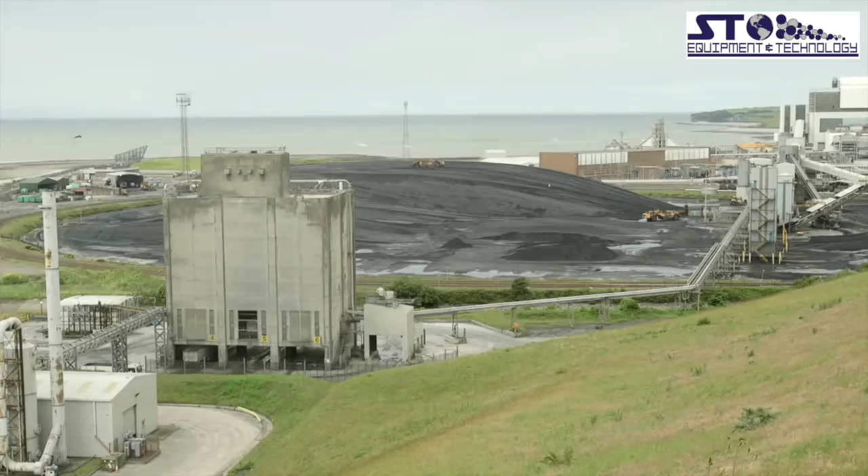Located in South Wales, Aberthaw is a 1,550 megawatt pulverised coal-fired power station comprising 3 units. The station was commissioned in the early 1970s and typically consumes some 5,000 to 6,000 tonnes per day of low-volatile semi-anthracitic coal, primarily sourced from local mines. This translates to around 250,000 to 400,000 tonnes per year of fly ash.

Historically, most of the ash was landfilled due to the fact that the high carbon and ammonia levels of the ash rendered it unsuitable for use in cementitious markets. This created a number of issues for RWE npower. Apart from the cost of landfill and the maintenance of the landfill site, there were increasing concerns being raised by local stakeholders over the ever-increasing size of the ash deposits.

In 2004, Lafarge Cement UK opened up discussions with RWE npower with the view of establishing a fly ash processing plant, CelticAsh, to supply its cement operation, conveniently located on a site adjacent to the power station.

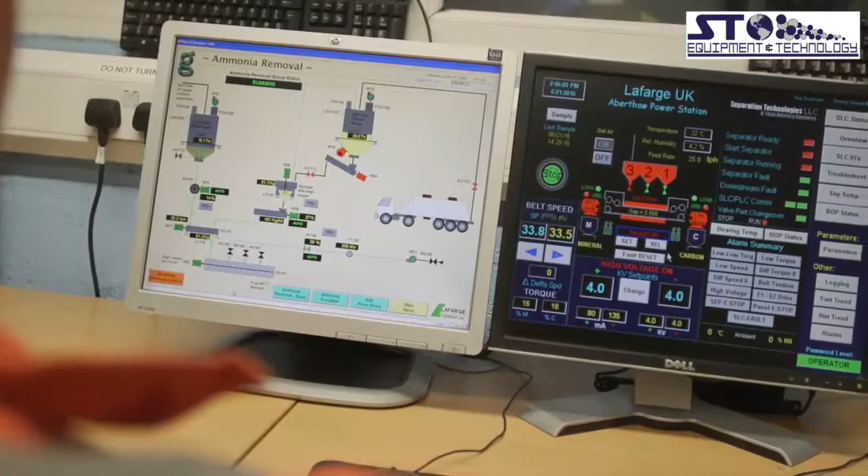CelticAsh offered many potential benefits for both companies. Increasing the use of fly ash in cementitious products would make a significant contribution to reducing Lafarge's environmental impact, both in terms of a reduction in CO2 emissions and a reduction in the need for quarrying of limestone and shale.

The use of fly ash will enhance the properties of concrete and mortars. The avoidance of landfill would offer significant cost savings and environmental benefits for RWE npower. The return of high carbon ash to the coal belts from the power station would offer significant fuel savings.

In 2006, and after a period of lengthy negotiations, Lafarge Cement UK and RWE npower arrived at an agreement to jointly fund the investment and operation of an ash processing plant at Aberthaw Power Station in South Wales. The actual share of the funding was based on an open book analysis of the relative financial benefits accruing to both parties. The £8.9 million project comprised of some 10,000 tonnes of ash storage facilities, truck outloading and weigh bridges.

The project also included ST equipment and technology for carbon separation, high carbon return to the power station coal belts, and ammonia removal from the ash together with an ammonia scrubber. The ammoniated ash was a result of ammonia injection to improve the performance of the electrostatic precipitators, rather than NOx reduction, the usual cause of ammoniated ash.

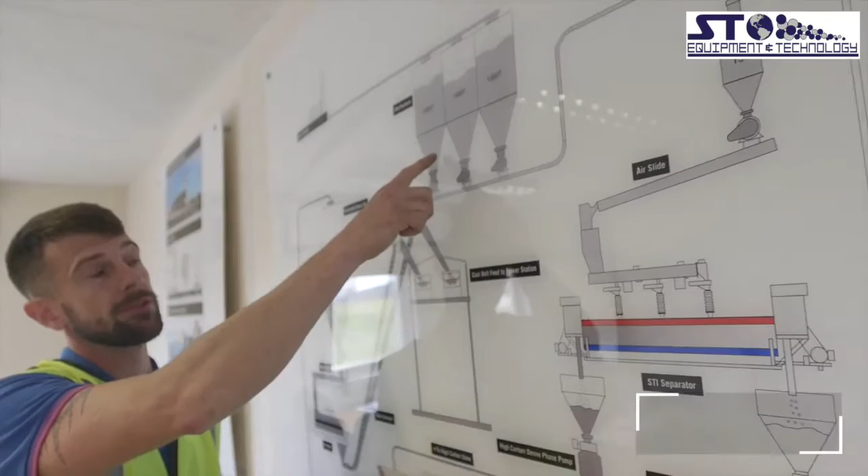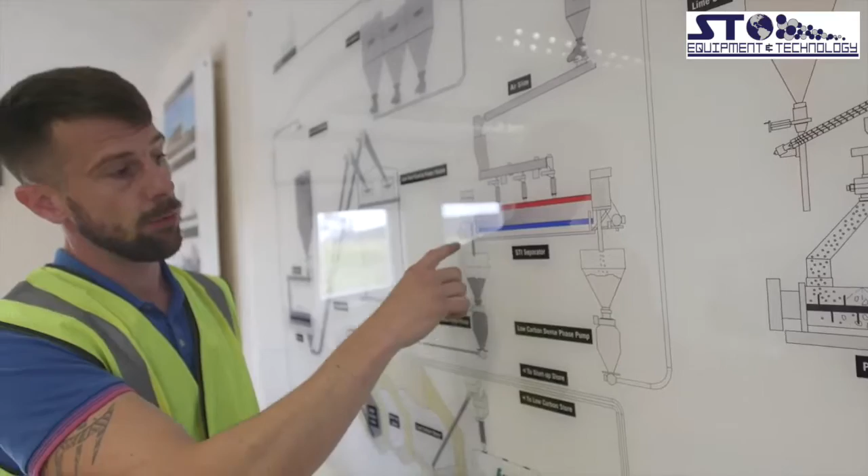The power station generates fly ash, which is transported to 3 silos. We tend to take from the middle silo and use blow pots to blow it across into a 15-ton silo in our factory. We use a rotary valve to control the flow into the STI machine, where we separate the high carbon from the low carbon.

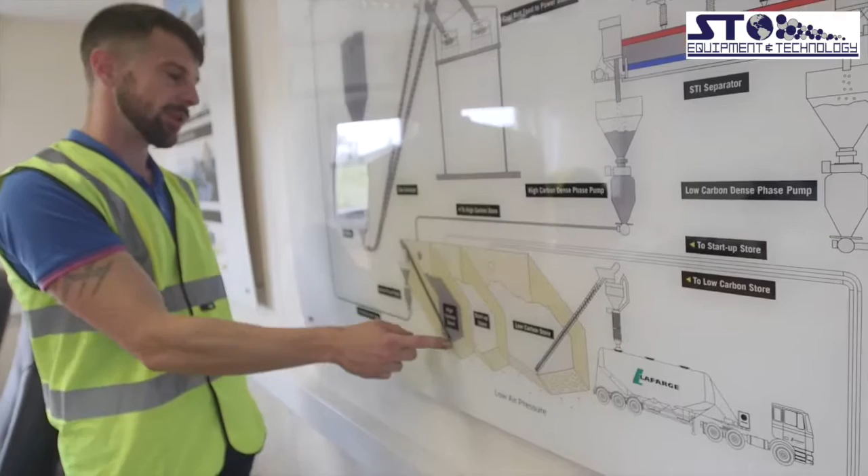The high carbon is then sent via a blow pot into a high carbon store which we've got in our plant. From this store we screw feed the high carbon up into a weigh hopper so we know exactly how much we transport back to the power station, and we then use a blow pot to transfer the material down into a 150-ton silo on the stock ground.

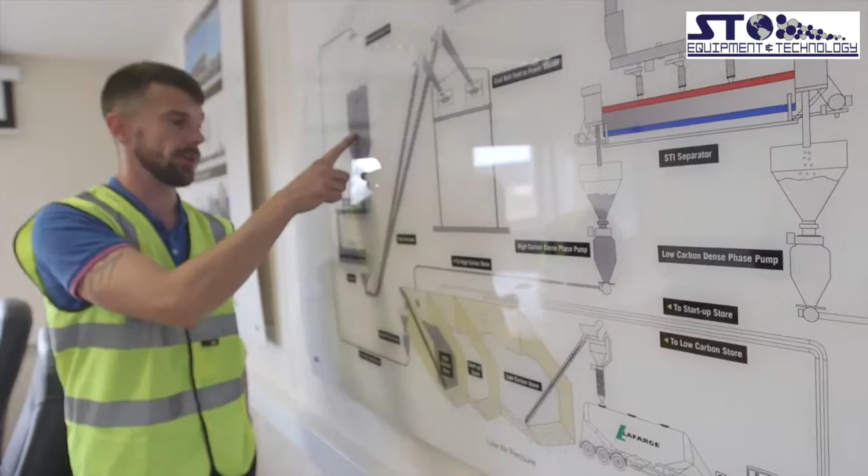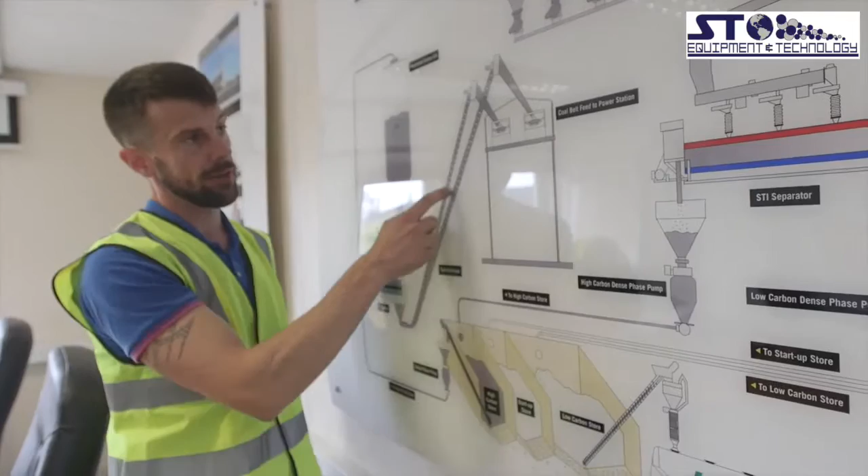From this silo we use a rotary valve again and drop it into a weigh screw, where we then add 20% moisture to make a condition that's transportable. We then use chain conveyors to send it up and drop the material onto the belt only when they're coaling for the power station. The low carbon, one of the characteristics here, is that it's high in ammonia.

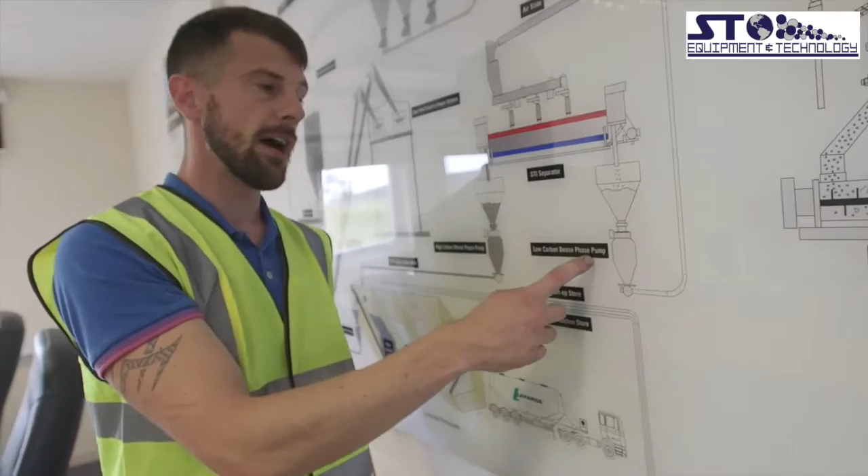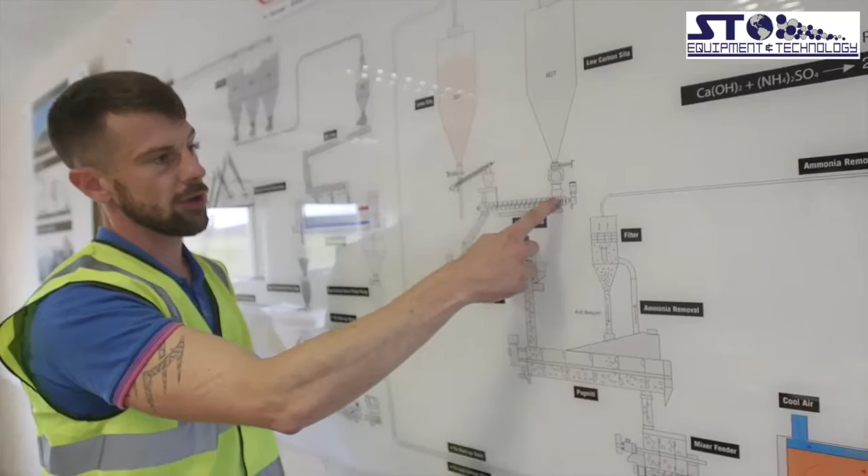So when we take the low carbon from the separator, we transfer it into a 60-ton silo. Again, using a rotary valve, we control the flow into a weigh screw where we add 0.6% lime. This is then sent into a pug mixer where we add 1% clean water.

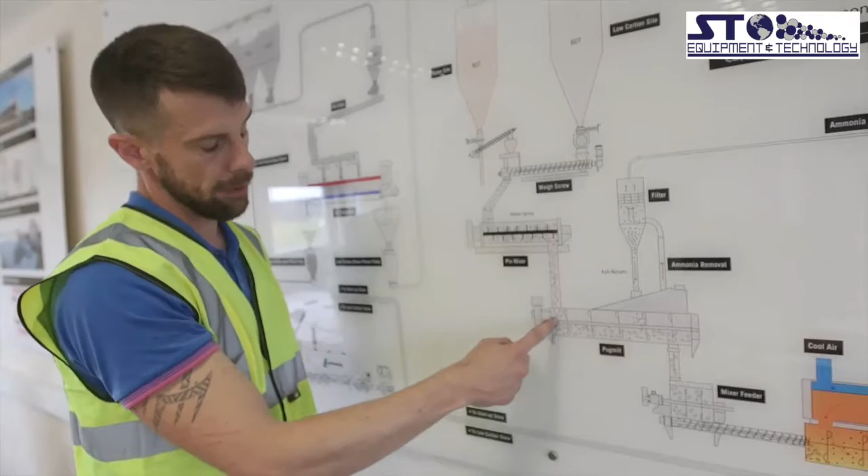There's a very quick mix that happens here, where we then drop it into a pug mill. The pug mill is where the reaction takes place, and basically what happens is the lime and water drive off the ammonia from the ash particles.

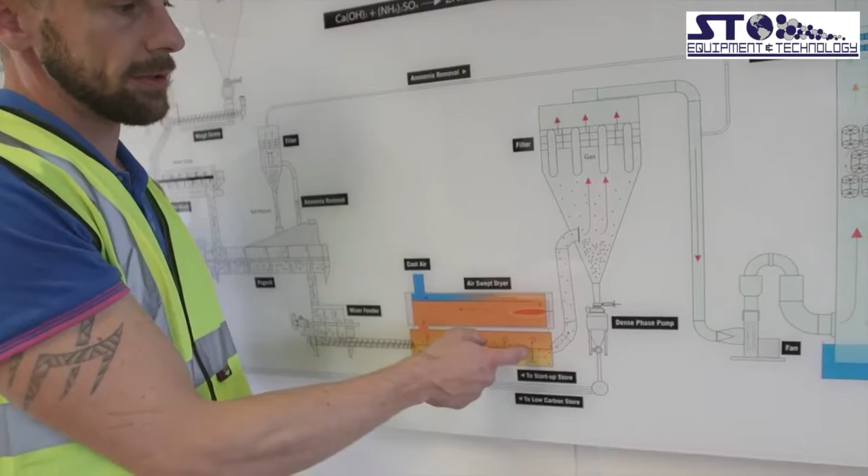We then drop it into a mixer feeder and screw feed it into a dryer. The dryer dries off the moisture and leaves a clean ash particle and ammoniated gas. The clean ash particle gets stuck on the outside of dust bags, drops down into a blow pot, and the blow pot then transfers it back into our stores, ready for dispatch.

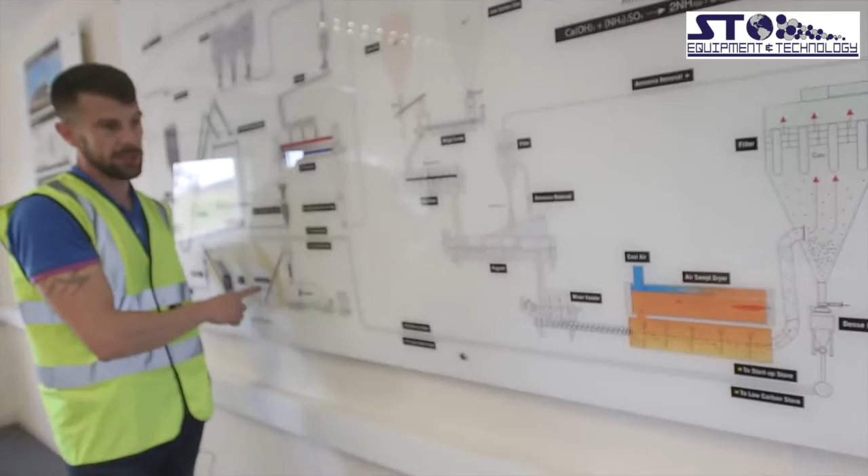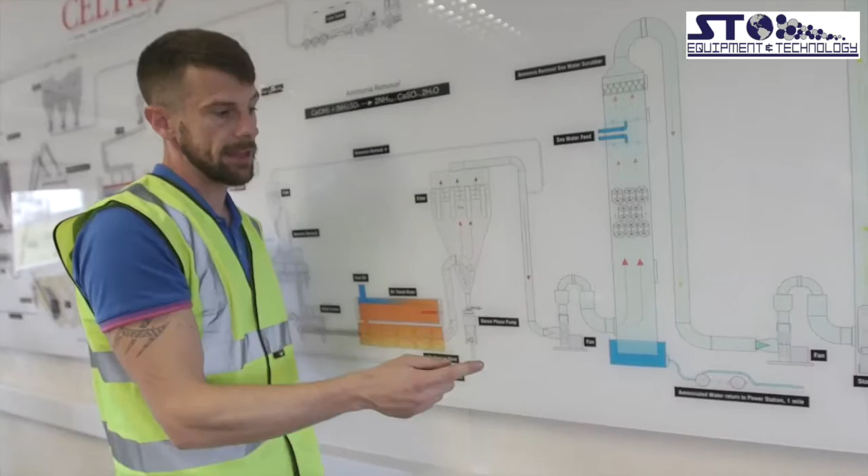The ammoniated gases pass out into an ammonia scrubber, where the ammonia is taken out of the gas, and we end up exhausting clean air and send the ammoniated water back to the power station for their water treatment plant.

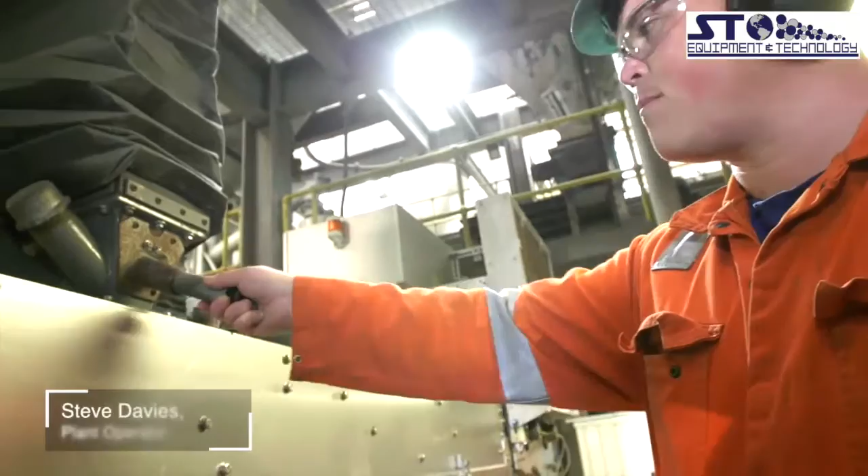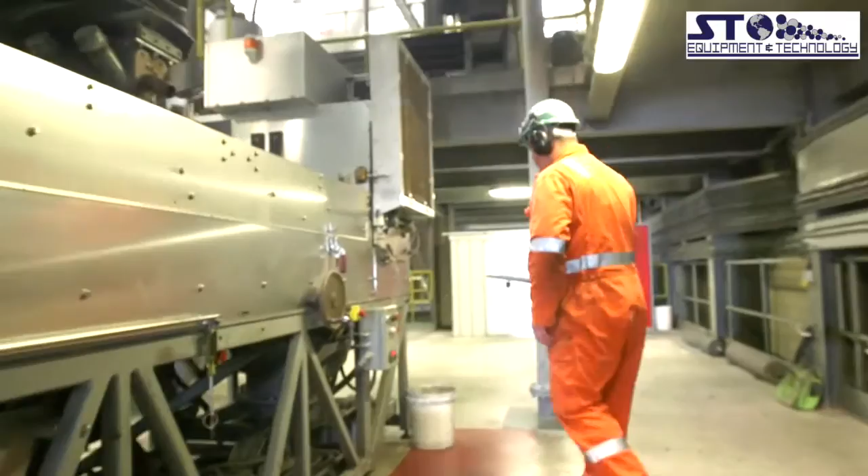So this is where we take the feed sample, the ash feed sample from. This is where we take the low carbon ash sample from. And this is where we take the high carbon ash sample from.

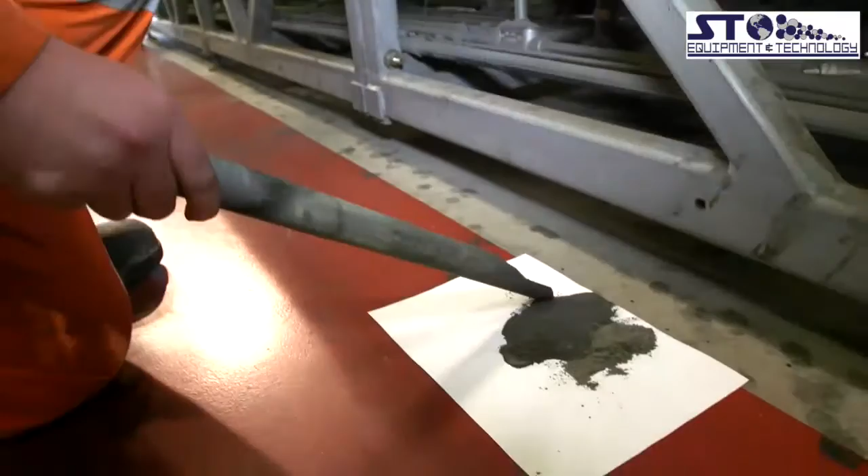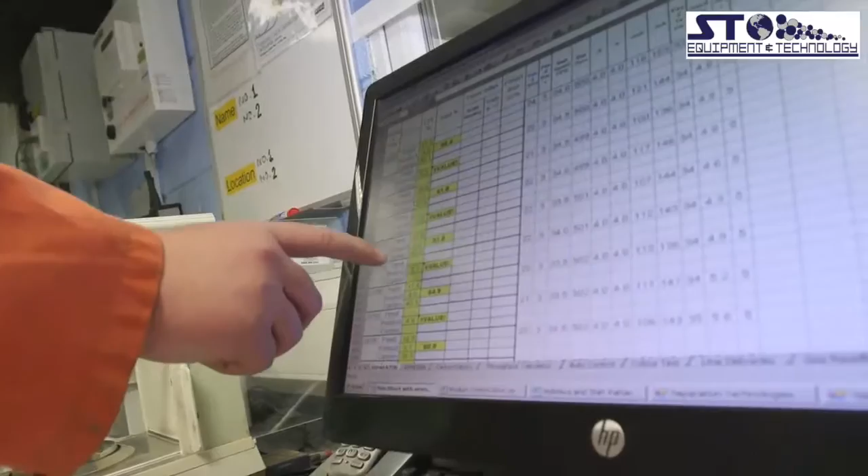We test the low carbon ash every half hour in the furnace. We record the results on the spreadsheet with the feeds and the carbon, and this gives us the average yield for the hour.

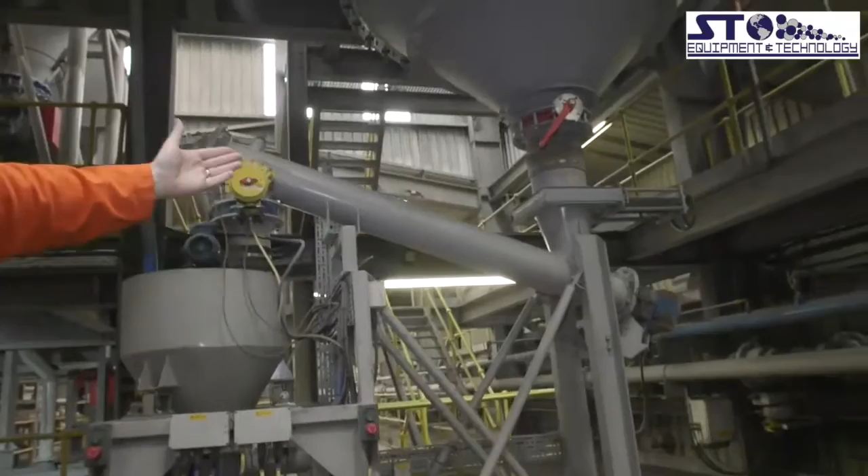Okay, this is the start of the ammonia removal process. The ash goes into this silo here, it drops down into a weigh screw, and then this is the lime silo here. It gets put into a feed screw, and it goes into a weigh hopper, and then that joins the same feed screw, and it goes down into a pin mixer.

The blend of ash and lime then drops into this pin mixer, where water gets added to it, and it creates a real intimate mix.

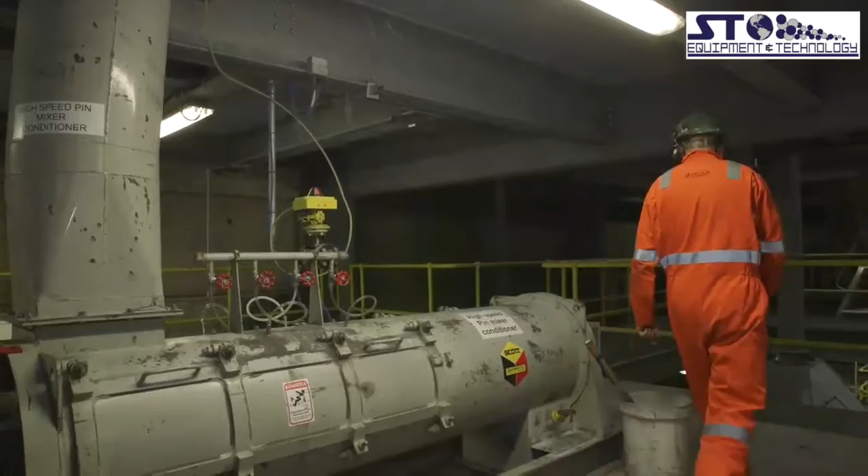The mixture of ash, lime and water then end up in the pug mill blender here. It's a slower blending process.

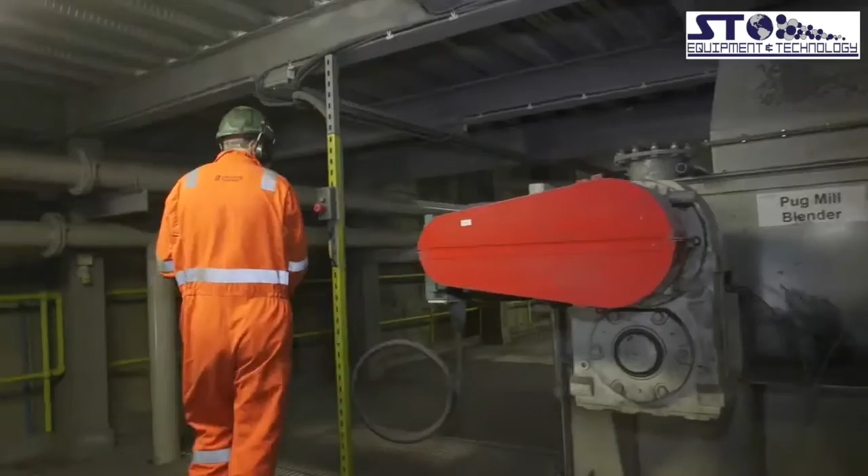The ammoniated gases then get vented off into the filter system. The mixture of ash, water and lime then drops down into the feed screw. Then the output from the pug mill blender drops into this feed screw, which then feeds the ash into the dryer system.

This now is the dryer system. When the ash gets heated up, it goes up there into the final product filter, which then drops into a blow pot, and then we can choose which store that we put our ammonia-free ash into.

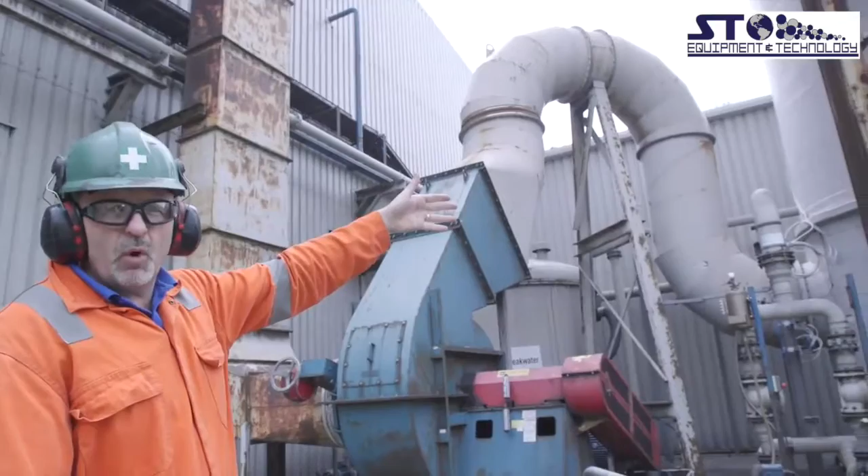Okay, here we have the ammonia scrubber. So the ammonia gases come through the system, get scrubbed with water, and then we send ammonia-free gas to the atmosphere.

The typical LOI of the incoming ash is between 12 and 22%. Typically we see 16% as average. The LOI of the low carbon ash is below 4.5, which is the standard that we work to, generally 4%. The LOI of the high carbon ash is generally around 45% LOI, but it has been known to be as high as 55% LOI.

The typical yield is about 75%. We do get to 80, but we do get as low as about 65. Again, it all depends on the incoming feed LOI.

It generally takes us about 5 minutes to start the separator and about 10 minutes to shut the whole system down. The CelticAsh operators are often aware of issues with the power station before the power station even knows.

Sometimes when we see the relative humidity go up, that indicates a tube leak. Often we see the ammonia levels go up, we'll indicate to the power station the ammonia is high, and they'll find that they've got a leaking tap on the ammonia system.

Typically the ammonia incoming feed is about 200 parts per million. When it gets to 300 parts per million, we'll inform the power station to say that it's high.